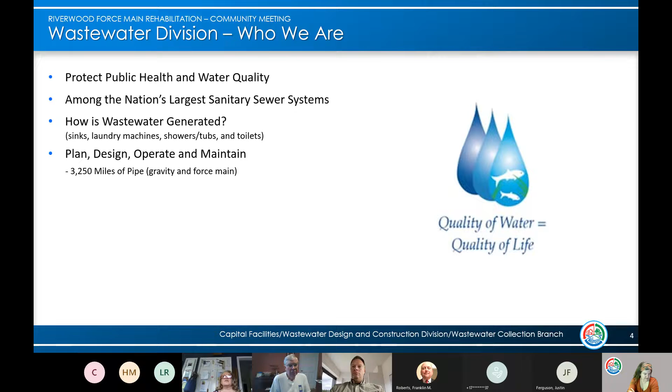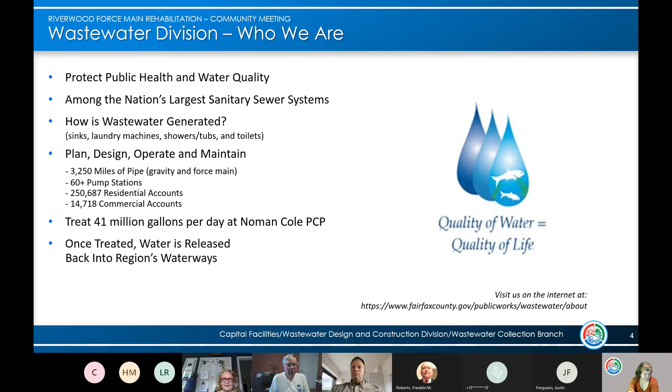I'll start this from the beginning, but we won't go through the introductions again. This was the meeting agenda, and this was what I was just talking about, the wastewater division and who we are. I won't repeat that, I'll just click through the slide here and we'll get on to talking about the existing force main. There's the link I was just talking about, so now you can see what I was just talking about, but you couldn't see on the screen before.

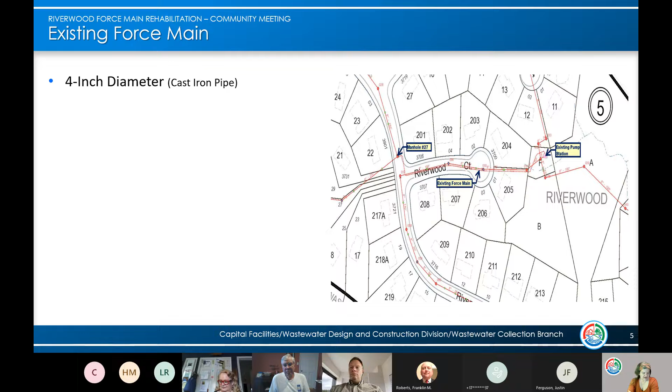The existing force main is a 4-inch diameter cast iron pipe, installed back in 1970, so it's 52 years old, and approximately 657 linear feet in length. It goes from the existing Riverwood pump station, over on this side, I don't know if you can see my cursor or not. It follows through lot 205 and along Riverwood Court, then zigzags and discharges into manhole 27, which is in Riverwood Road, close to the intersection with Riverwood Court.

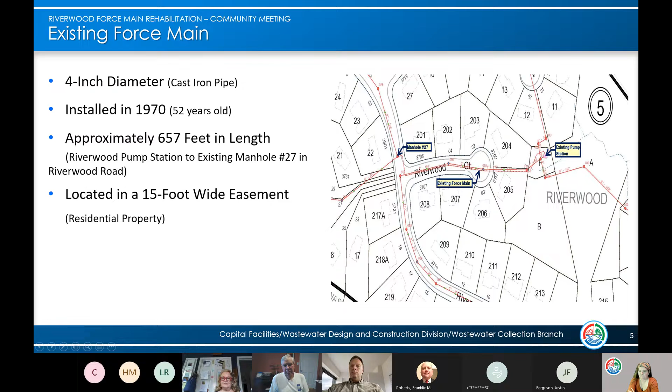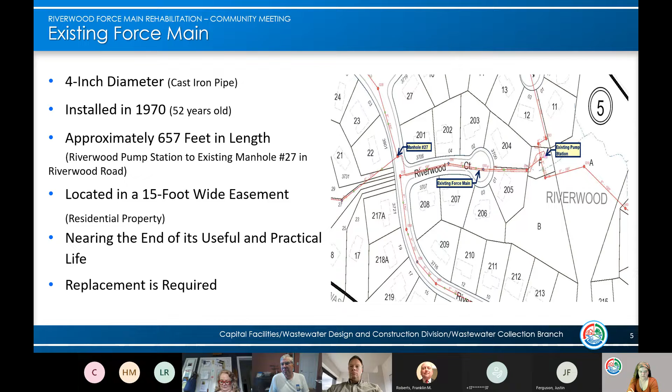Where it's on residential property on lot 205, it's located within a 15-foot wide easement. Right now it's nearing the end of its useful and practical life, being that it's 52 years old, and replacement is required. Here's just a larger overview of how this existing force main runs.

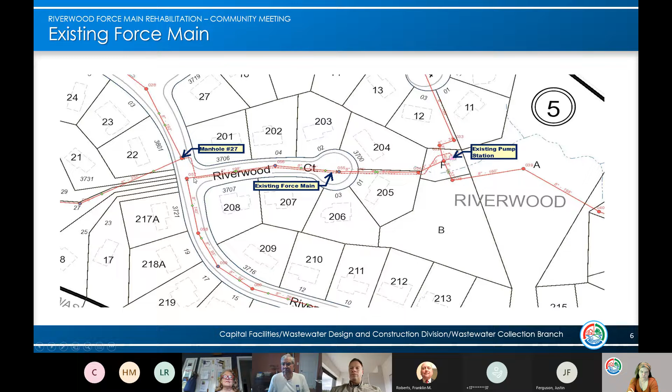The existing pump station is located sort of back, we access it through an access road that goes through the Riverwood HOA. There's a little recreation area there. The force main is this little dashed line, runs through lot 205 and then along almost the southern end of Riverwood Court and out here to manhole 27.

So the project benefits: there'll be a new 4-inch ductile iron pipe that will serve the surrounding community for the foreseeable future. Replacement of that pipe will reduce the level and frequency of maintenance required to keep the force main operating, and it's going to prevent costly emergency repairs and provide residents with safe, reliable utility infrastructure, enhancing the quality of life for residents. Furthermore, it's going to reduce risk to public health and the environment.

This is the plan and current plan and profile for the force main. This is where the existing pump station is, so we're installing it out the northern end of the pump station wall. There's going to be a new bypass vault. I can pull up a set of drawings here towards the end if you want a better view of that. It will come across and be located within the existing sanitary sewer easement on lot 205 until it gets about to station...

I can't hardly read it there... 1+67. It's kind of hard to read, but it will come over onto lot 204 and then out along the northern side of Riverwood Court. For the most part, it's going to be approximately 7 to 10 feet below grade.

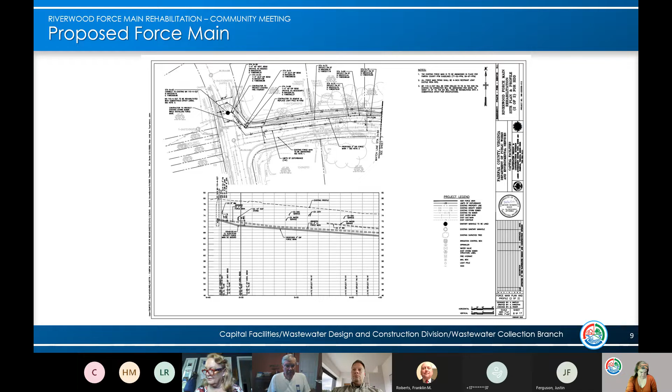So I'll let Matt, I don't know if he could take control here, and well, what I'll do is I'll control this, and we'll go through the construction sequence.

So the first part, we have about 4 main steps that we've broken this into to help people understand how this is going to take place. The first part is, other than the upstream and downstream ends, this new force main will be far enough away from the existing force main that we can install it while leaving the existing force main in service.

You can see from here, if you could just click that, Natasha, and then we can show it. There we go. So you can see that the bulk of the force main we're going to be able to install while leaving the existing force main in service.

And while we're doing this, for the residents on the side of the court closest to where the excavation will be, we'll be using steel plates to cover up the excavation, and the contractor will also be backfilling as they go. So it's possible if they're digging in front of your house and don't quite finish backfilling that day, they'll put a steel plate over it and then cold mix to hold it in place. Probably the next day they'll come back and backfill over it, then put some temporary cold mix pavement on top.

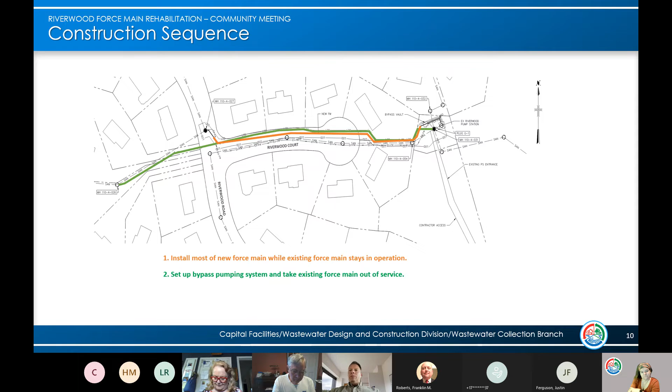So once all this is done and tested, the contractor is going to install the bypass pumping line. That will take the flows that collect at the manhole just upstream of the pumping station. There will be some pumps there, and they'll pump them to the manhole downstream of the discharge manhole for the force main. So through all of this, the sanitary service for the neighborhood will remain in place, everything flowing by gravity to the pumping station.

And then once the bypass system is set up, the contractor will do the connection to the discharge manhole on your left, and then the connection to the existing pumping station on your right. Finally, when those have both been tested and passed, the contractor will take away the bypass pumping line and the new force main will be in service. Then the contractor will finish up with the restoration.

I wanted to also explain that the pavement restoration will take place in 2 parts. There's the first temporary part they do when they're finished with individual sections of the force main installation, and that's just temporary — they'll even it out as best they can. But when they're all done with everything, you can see the limits of pavement restoration here. They'll mill out the top and put down a nice, smooth, even coat. So this will be a brand new, nicely paved intersection and a nice new paved court when they're all done.

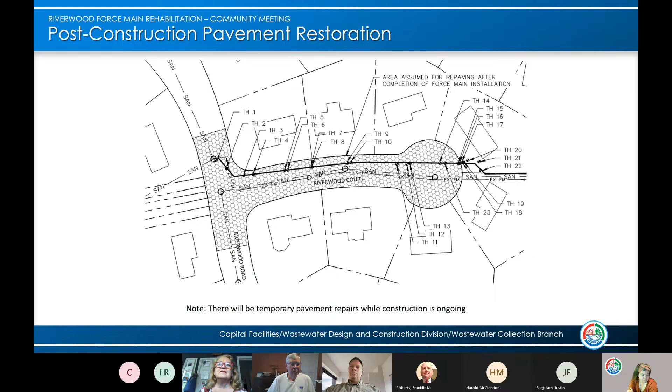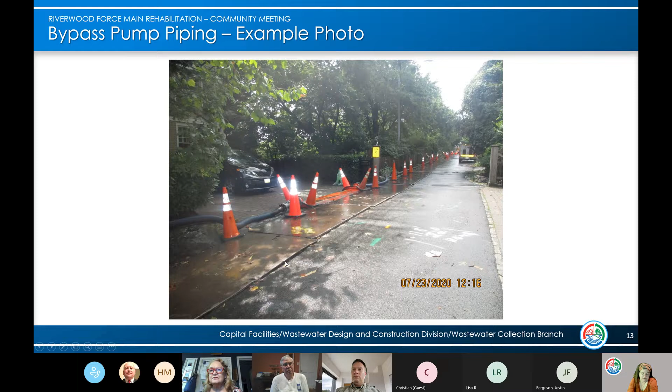And we've set the sequencing up to minimize the amount of time we're going to be on bypass piping, bypass pumping. So we've sequenced this accordingly to try to avoid being on it very long.

So instead of having it for the entire project, we're minimizing it as much as possible so that it's only going to be in place while they're connecting, finishing up the connection of the new force main to the pump station itself and to the manhole that's in Riverwood Road.

So are you starting at the pump station, or are you starting at the manhole in Riverwood Road?

We are starting with constructing this piece of force main pipe first. So when that's being done, there's not going to be any bypass piping laying in the road or anything like that. So this is where they'll start with this first.

No, the question I asked was, when you start construction, are you starting construction at the pump station and then going uphill?

Do you want me to answer that one? Yeah, you can answer that. So the way that the contracts are typically written, the contractor can decide that in the field, but usually what they do when they install something like this is they want to start at the downstream end.

Which would be at the pumping station, and then work their way upstream. So most likely what they would do is start at the pumping station and then just work their way up the hill, out into the court and towards the manhole.

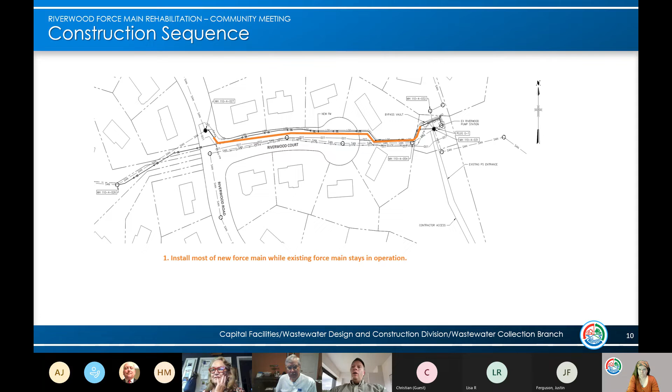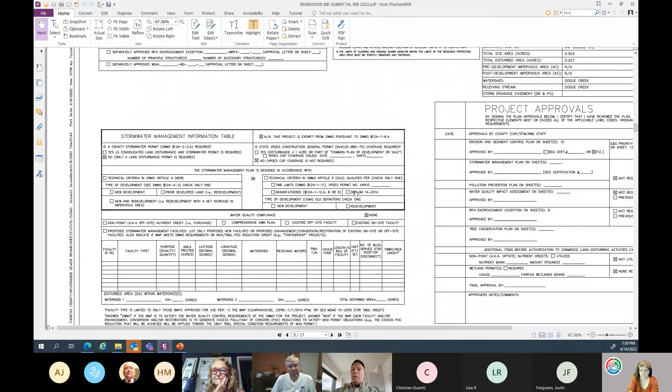So if they're working in your yard and they find that the force main is cracked, then they can do a temporary repair to stop that leaking. It would just be a short kind of patch, because eventually that force main is going to get replaced with the new force main.

And one thing I should have mentioned earlier - when the contractor has put the new force main in service, what they'll do with the old force main is cap one of the ends, fill it with a lightweight concrete, sometimes called flowable fill, and then cap the other end. So you won't have a hollow pipe sitting there underground - it'll be filled up.

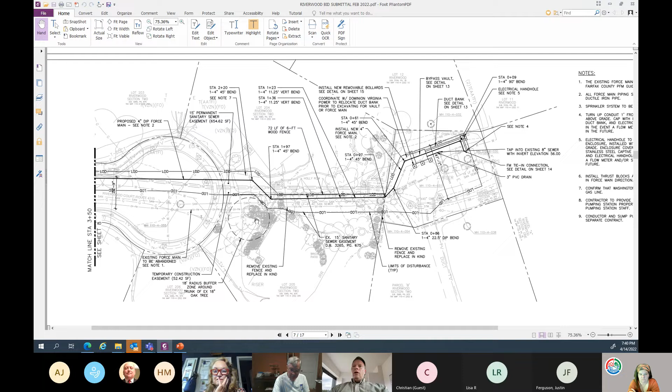If there's a crack in the storm sewer, I'm not quite sure how the county would handle that contractually, but what they can do is have the contractor do an emergency repair via a change order. Or I don't know, Natasha, does the county have separate emergency contractors for storm sewers?

We have emergency contractors for our wastewater. If this happens and it's on our wastewater project, then it could be handled through a change order if something happens.

And I think right here, where this crosses, it's going to actually go over the existing storm pipe. So there's an existing 30-inch RCP storm right here where it's going to be crossing. So if they dug in this area, for example, and found something collapsed, that could be handled through a change order to repair that.

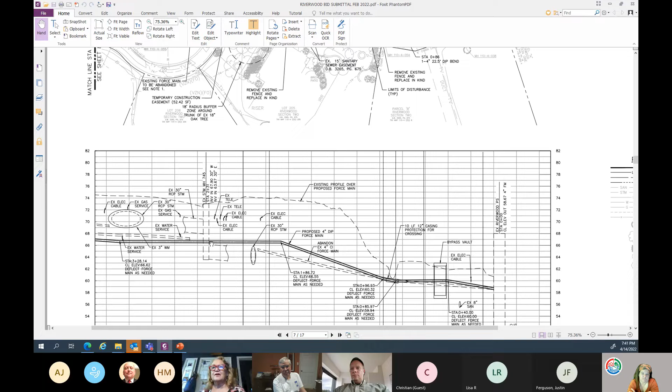Well, it's further out in the front yard. So I was just curious - is this happening more? Is this a major thing when they start digging our front yard? Yeah, because this is close.

When the guys came to do all those holes to see exactly where the gas main was, he filled it up and really patted it down. And the next day it was down 8 inches. So he went and got road debris or something like that, and he filled it up with that.

So this is my concern - my front yard is sinking, and it sank even more after we had the soil drilling done. I'm concerned that if you just fill it with soil, it's still going to drop. But if you put rocks or something in there to allow the drainage to go down, it might solve it.

Well, one of the things is that with the sewer installation, like I mentioned before, the contractor is required to compact it so it doesn't sink. I wasn't out there with the crew that was doing the test holes, but I'd be very surprised if they did anything to compact that - those holes are so small, it's difficult to do that.

I don't know, Natasha, is there a liaison between the county stormwater and the wastewater departments? Is there somebody from that group you could have come out and take a look at that?

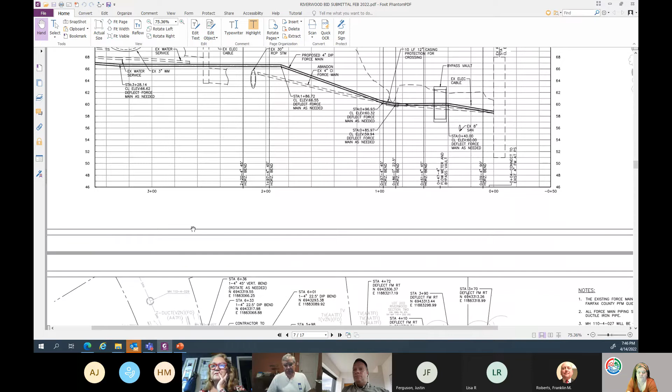So I was talking about, somebody was asking since they have this corner property, they were asking if any of this stuff would be on their property. These drawings give a little bit better picture of that than my slideshow does. So this little two short dashes and long line here is that right of way, and then our limits of disturbance is out here in the street.

Well, I know that the people, especially whose houses you're going directly in front of, would want to make sure that the pavement is good. Because sometimes they come in and dig up and leave this patch, which is a mess. So you're talking about Dominion? Virginia Power? Yes.

Or any number of utilities. You've got Fairfax Water, you've got Washington Gas. Oh yes, the gas company wants to come in and change the meter now. It never stops. Well, that's what happens when you've got a lot of utilities in the street - there's always going to be something that needs to be maintained or replaced. So in newer construction, do they place the utilities in the street? Do they do what?

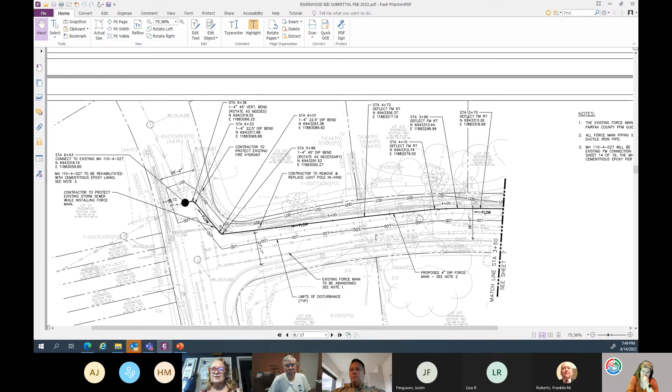So will they dig under the gas line too? Let me see here. There's gas service lines, so they'll have to hand dig under that. There's a couple of gas service lines. It looks like this is not the gas main, we're not crossing the gas main, it's service lines. There's a service line that looks like it goes back towards your house there. Yeah, it's a service line to our house, right? Yes, and they'll have to hand dig in those spots. So they'll protect them. Okay.

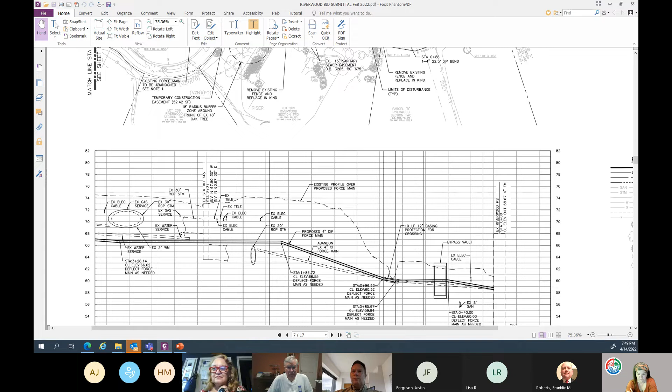All right, so they'll probably be exposed. Like if you were to look inside the trench, you would see the utility lines sort of suspended in midair over top of where they're digging. So they have to protect those. And it's important, before they dig, they'll have Miss Utility mark all of these utilities in the field, so they know pretty much where they're located and where they need to be careful.

Well, Miss Utility was a little bit off the mark, and the company that you hired to come back was 100% better, they were much more accurate. Are you talking about surveying and mapping, Sam? Yeah, I think so, they're the ones who did the utility locating work. So they actually did the test holes and everything to physically locate where these were in relation to our force main pipe that we're putting in. One of the utilities on the plan was way off mark, it took them quite a while to find it.

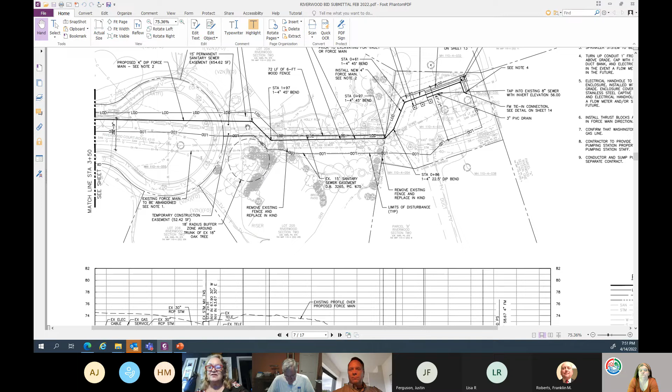So are they going to dig around our sprinkler system? I remember when Mr. Doyle was here, he said something that you would fix the sprinkler system as you go along. Okay, where are you talking about, your sprinkler system? I know you had a sprinkler system in the backyard. Oh, we have one in the front yard, and so does the Marzettis. Okay, so the contractor is -- we have written in the plans and the contract documents...

So we have specifications that are provided to the contractor as part of their contract. They're required to restore anything that they damage during the course of construction, such as your irrigation system -- they're going to have to restore or replace whatever they damage to pre-construction conditions at the end of the project, when they're getting ready to restore all this. So anything that they damage or have to take out -- if they have to remove something, which they wouldn't necessarily have to remove your irrigation system, but if they damage or have to move something, they have to replace it at the end.

Okay, I mean, I just need it confirmed by you. One person says it, but you're directly responsible.

And just as an example, we had a project where we did a rehabilitation of a force main, and I think we had a construction entrance that went across some irrigation for an HOA. We came up with -- I think the HOA had the stuff repaired because they wanted to use a particular company that installed and maintained that, and then we reimbursed them for the expense at the end. Oh, okay, so that's kind of like another option right there, but they had a preference as to using a certain company that installed that stuff. Right, so that's who we reached out to, or we could have the contractor utilize that same company, and then we would reimburse our contractor for that work.

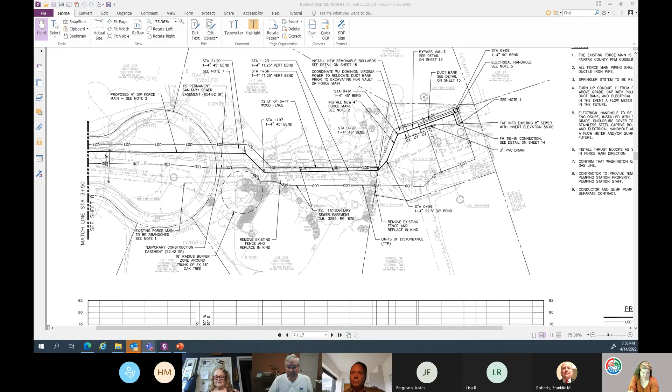No problem, and I apologize, I didn't start off too good in terms of I wasn't sharing my screen and I was sitting here just rambling on. Well, sometimes when you do these Zoom meetings, you're so focused on your presentation, you don't think of all those other details. Right, sometimes it does help to ask, can everybody see my screen before you get started? So maybe a little lesson learned here for me for future presentations.